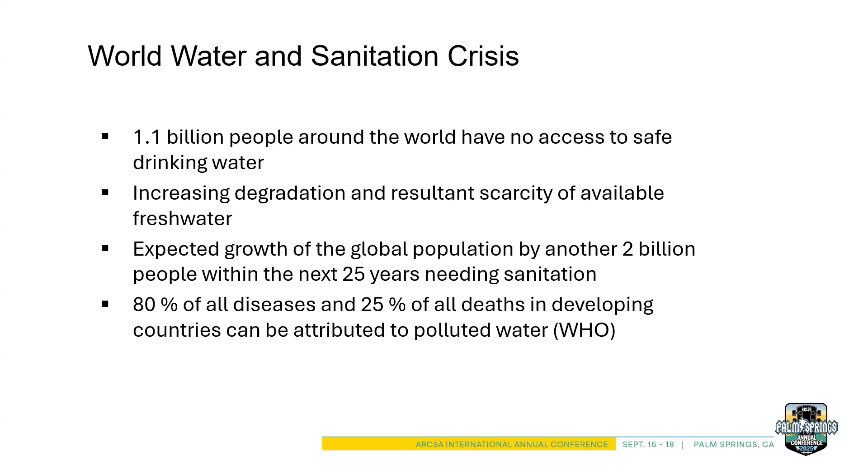As you know, there's a lot of people in the world that need water, and with pollution and things, the asset that we have—some numbers say less than 1% of the world's water is available fresh water for use—is a diminishing asset as we have increasing pollution. Coupled with increasing population, we've got increasing demand on that asset, and we can't forget that a lot of the really icky diseases are waterborne diseases. So that's why we see the importance of this.

Recently in Stockholm they had the World Water Conference, where interestingly they talk about food, energy, and water security, and how the water issue also contributes to food security in countries. The United Nations is also active—they have their Sustainable Development Goal 6 for water.

I was fortunate to attend, with my colleagues from the International Rainwater Harvesting Alliance out of Geneva, the 2023 convention, and that's where I learned the length and breadth of how international the problem of clean water is. About that time was when we got involved with Data Raywall there in Nepal, which kind of put an underscore on the issue.

20 years ago, we saw emerging droughts in this country, and we had some colleagues from Australia that were members. So we gathered up all the good ideas we could from around the country and around the world, and put together a rainwater guideline. That got the attention of some of the code writing bodies—the people that write the rules for plumbing systems in the country—with IAPMO basically being our chief supporter in that regard.

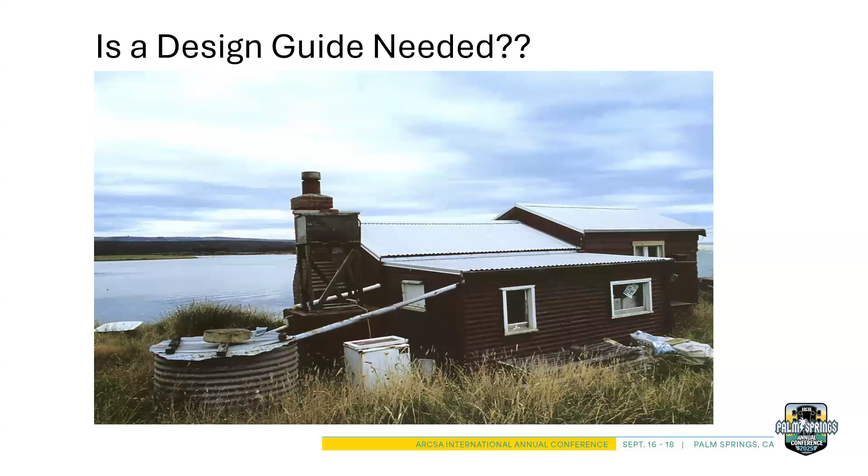But what about the people that are off the grid, that don't have access to power and some of the technology that we in the West have? That's what drove the need for our off-grid standard, reflecting some of the work that Data Raywall is doing in Nepal for his people.

So the first thing was first flush, trying to get the water clean. We've done a lot of papers, and I read a lot of papers when we developed this, and the common thread is that there's a lot of debris that comes off the roof—fecal matter and such—that causes diarrhea and a lot of other diseases. So the intent is, let's clean the water up as best we can.

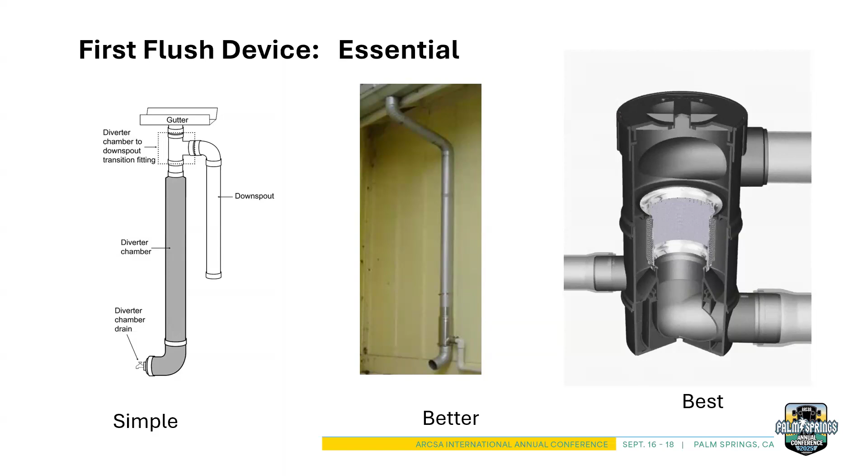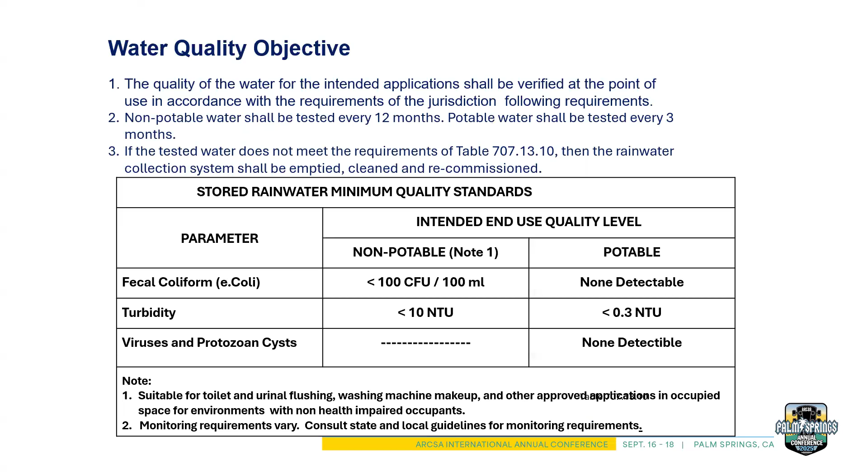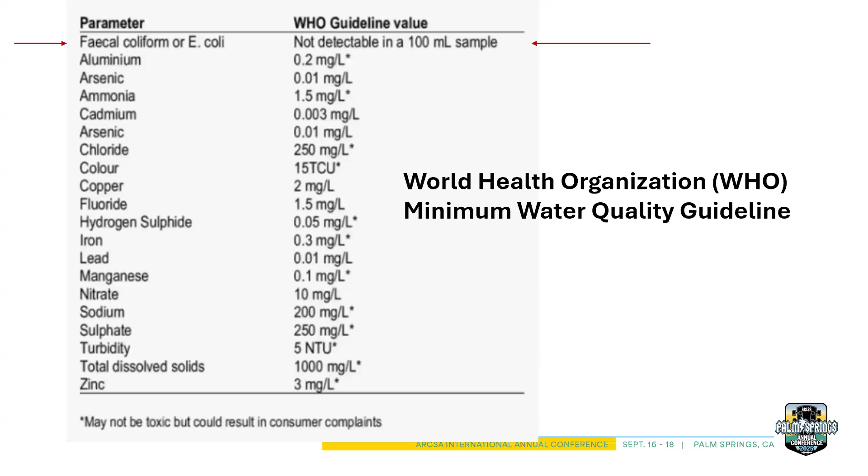These are the water standards that we try to aim for here in the West. Nothing new, but coincidentally, we're very similar. You can see up the top here, that's the same as the World Health Organization standards for fecal and that kind of thing. The East and the West are on the same page in that regard.

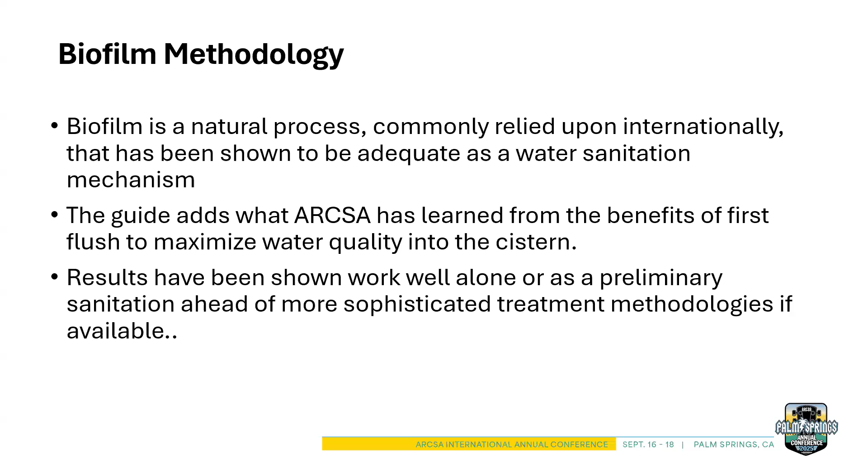The thought being, the better quality going into the water, the less work the biofilm has to do, and the better quality of water out. The results have shown that it does a very good job, not only as a preliminary device or even as a component to a more sophisticated sanitation method, but also as a standalone in some regards.

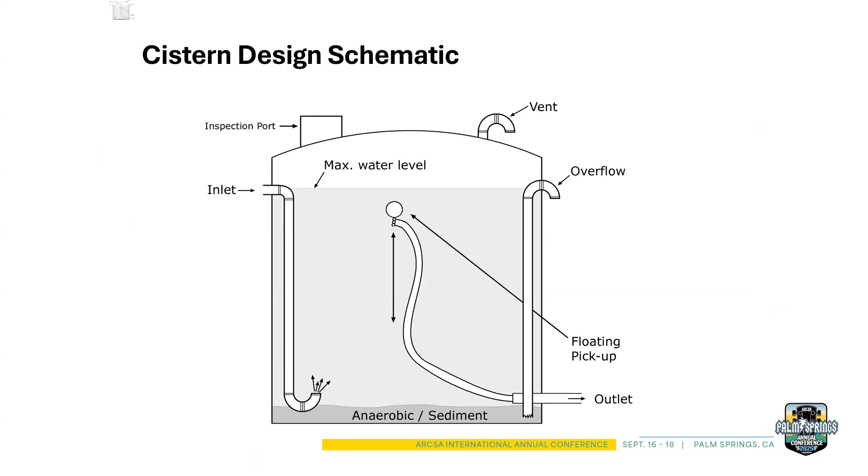The mechanics of the biofilm: it begins to grow, it matures, then it basically sloughs off. And this falls to the bottom, which is where your vacuum overflow would come in. As it falls off the bottom, that debris will be drawn off to waste, keeping your water quality clean.

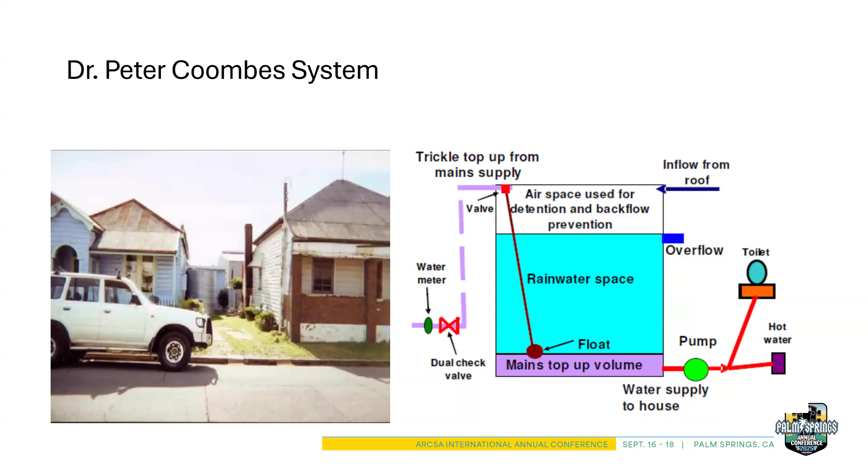Hot water is presumed to be heated to 140 degrees Fahrenheit, which I believe is about 60 degrees centigrade. Once it gets up to that temperature, it's presumed to eliminate all, or at least most, of the harmful bacteria that you'll find in water.

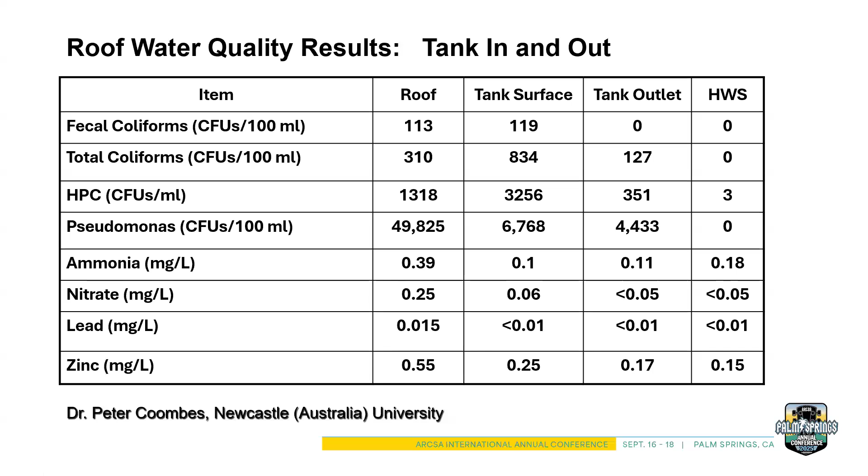This is another example of what you would call the clean tank, quote unquote.

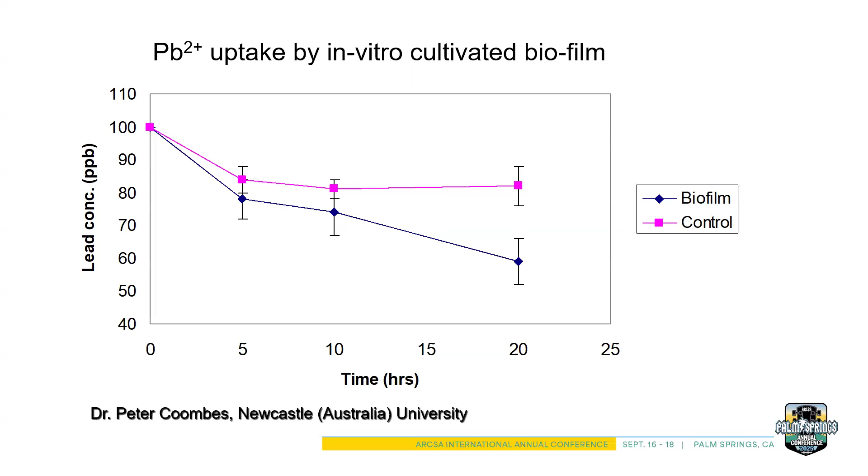Where you scrub the biofilm away, it doesn't really help that much compared to the bottom line here, where you can see the biofilm within a matter of hours can reduce maybe 40% of the heavy metals in the water. This speaks to the work of biofilm effectiveness.

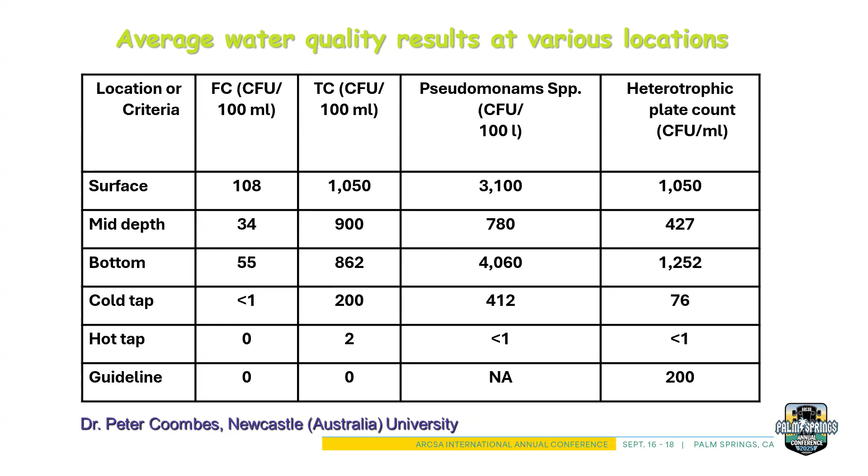As a side note, why do we want the floating inlet? As you can see here at the surface you have this level of contaminants, and at the bottom you have another level of contaminants. But at the middle, right below the surface, you can see the benefits of drawing water off below the surface of the water. This also speaks to the benefits of heating the water to further diminish the bacteria. This is the work of Mooyoung Han.

I met Dr. Han at the UN conference back in 2023. I was impressed with his work and have kind of been following it. Dr. Han basically does exactly what we're talking about here.

He took advantage of the biofilm as done by Peter Coombes in Australia, but he added a first flush that basically allows the water to be clean before it goes in and is distributed throughout the building afterwards. He uses sequential tanks, which adds additional surface to allow the biofilm to progressively improve the water.

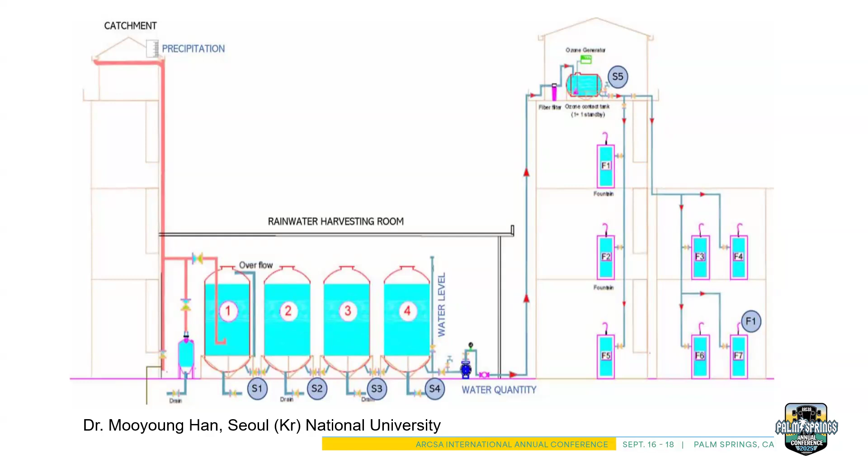As early research, he basically put a lot of small 3 by 5 inch cards on fishing string and strung them in a tank to provide additional surfaces for biofilm to grow. This is probably a more evolved methodology that he came to, doing the same thing only with sequential tanks rather than small cards.

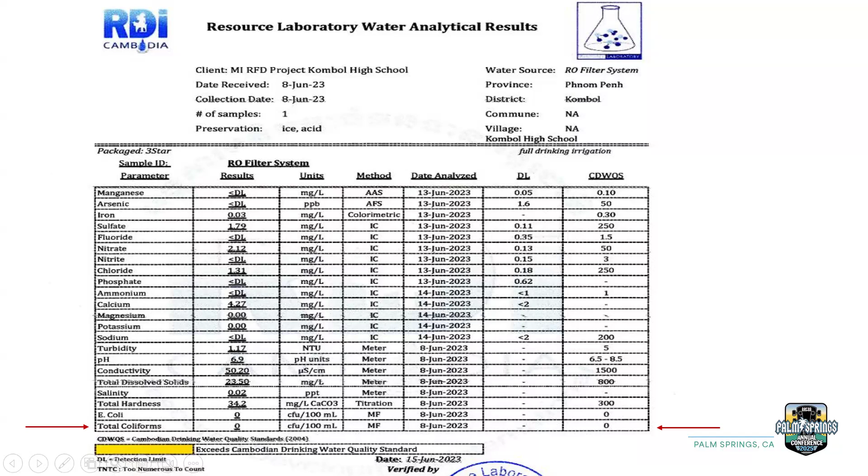You could see the effectiveness of this. This is a school in Phnom Penh, Cambodia, and you can see down at the bottom that yes, it passes the Cambodian Drinking Water Quality Standards.

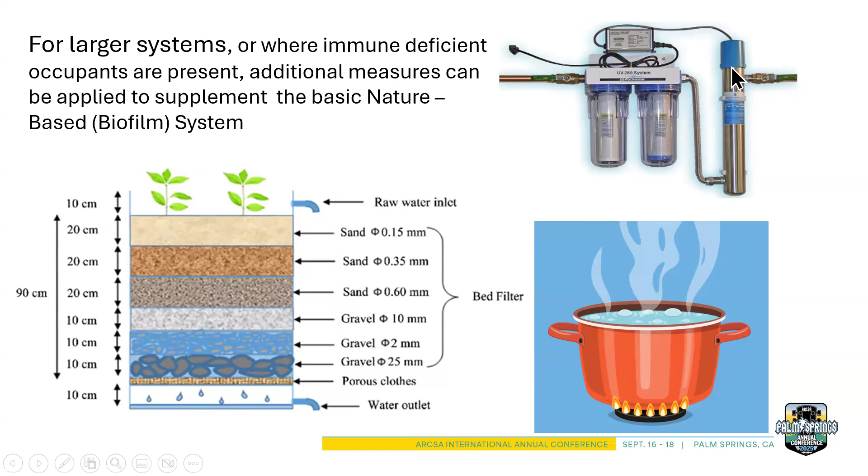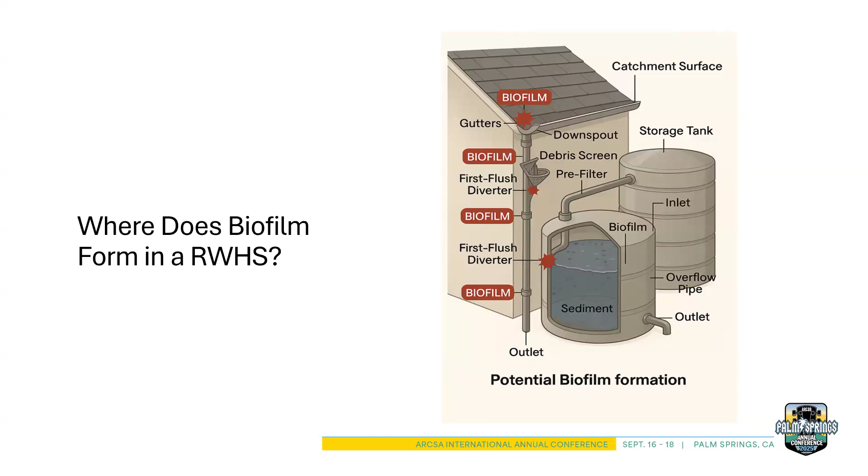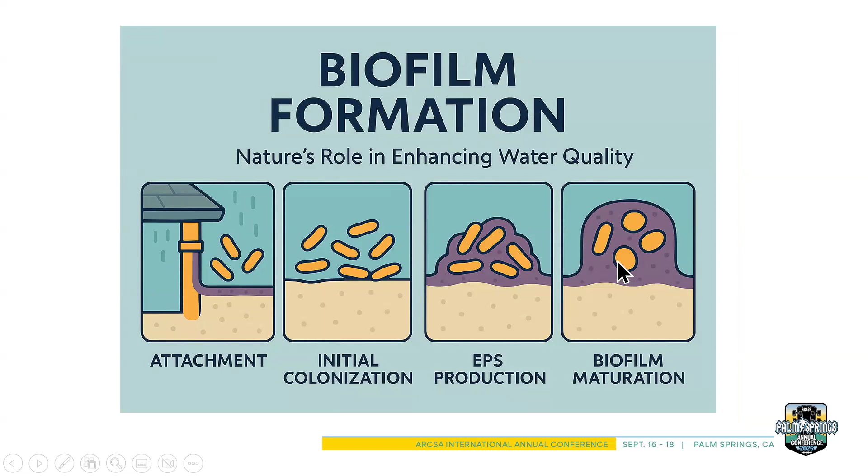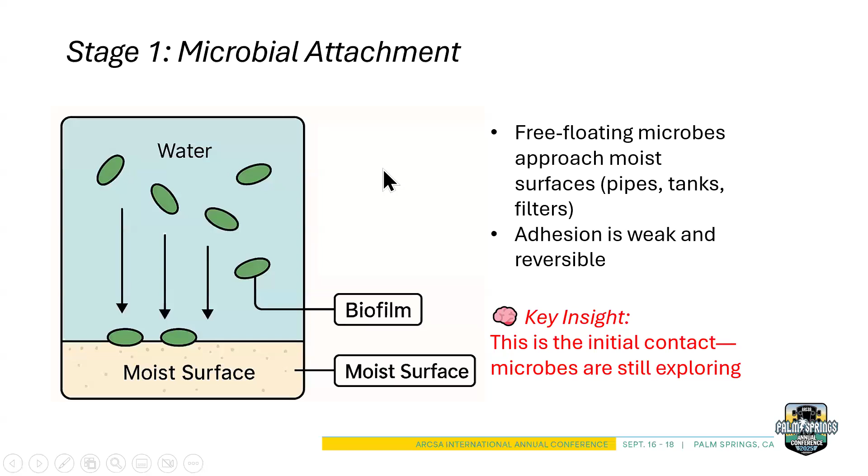I'll just skim through this and let you read it as you go. He does a good job of explaining it. Again, this is where it kind of starts, colonization, they multiply themselves.

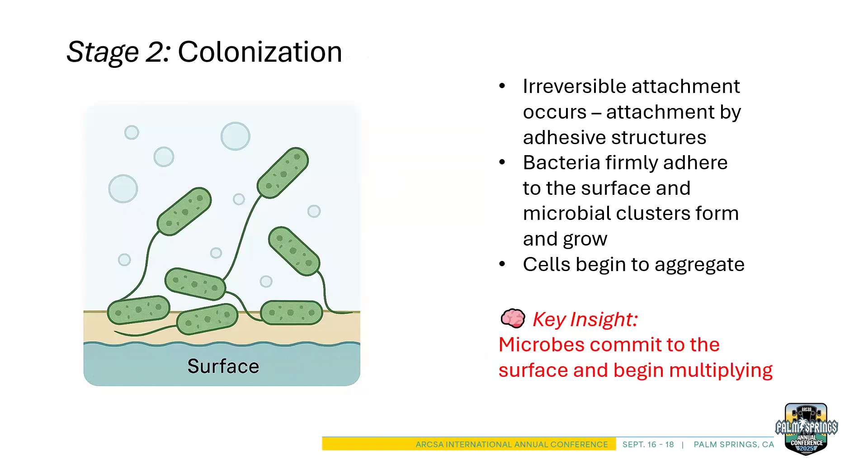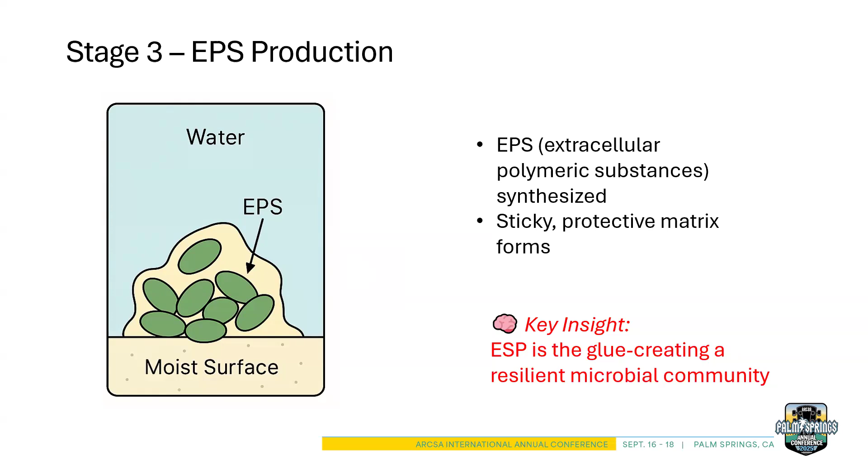This is kind of where the magic happens, I guess, in that they make this resilient glue around the process but create their own little microbe community, and they then feed on the bacteria and heavy metal that you're likely to see in the water.

So why is that bad in a commercial system versus the off-grid system? That's a good question. What happens is, as we go through the life cycle and the maturation system, they slough off, just like flowers or dandelions. They blow away and accumulate, and that debris acts as a media for bacteria to grow. Once it grows, blooms, and dies, it accumulates in piping, and that acts as a media for other bacteria to grow.

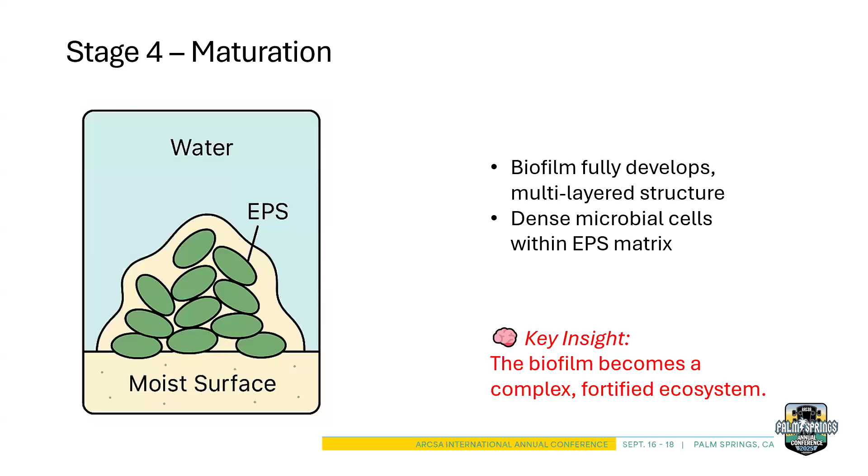But whereas in the rainwater system, it sloughs to the bottom of the tank and we flush it out, and that keeps the water and the biofilm working in a positive manner. Good explanation. Again, this is kind of what I was talking about—it breaks down and seeds the biofilm elsewhere.

Biofilms can enhance microbial stability, but may clog filters and reduce flow. That's kind of what we just talked about. Monitoring EPS - there was a definition of that I glossed over - that's the glue that goes around the microbes themselves. And then design choices influence the biofilm behavior.

One of the problems that makes biofilm a bad thing in plumbing systems is that we're still using the same pipe sizing they did back in the 40s and 50s, yet we have high efficiency, low flow toilets and faucets. That gives the water more residual time in the piping system, and more time for biofilm to accumulate. As a side note, we are in the process of revising our sizing parameters to decrease pipe size, increase pipe velocity, and move water through the piping systems faster.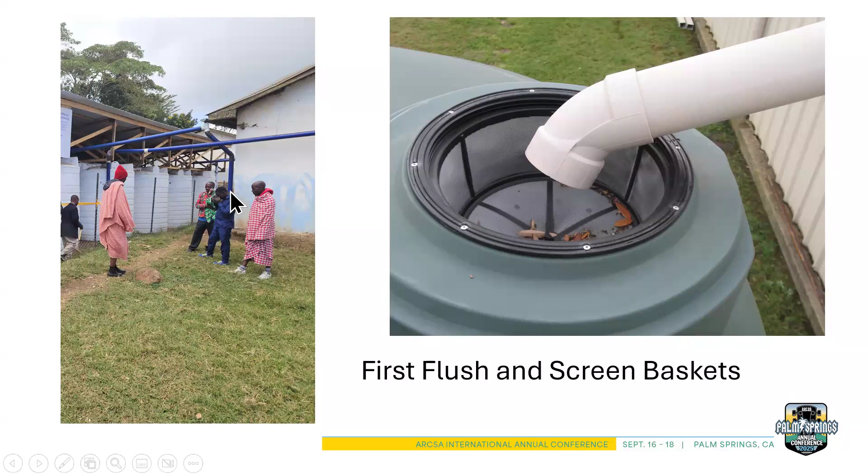This is one of the systems that Billy and his team put together. You can see over along the corner of the building where the first flush is, and the sequential tanks that Mooyoung Han recommends. These are the people drawing the water, which has been quite successful. I'll put an underline on the benefits: first flush, and then filtration of the water to get as good a quality water going in as possible. Over here you see the first flush piping, which branches off and goes to the tank - and again, the same thing, first flush going to the tanks.

Another project - these are probably the tanks they had available. We wouldn't recommend these white tanks, because they allow sunlight through, which lets algae grow inside the tank, which is counterproductive. But again, they do what they can with what they have.

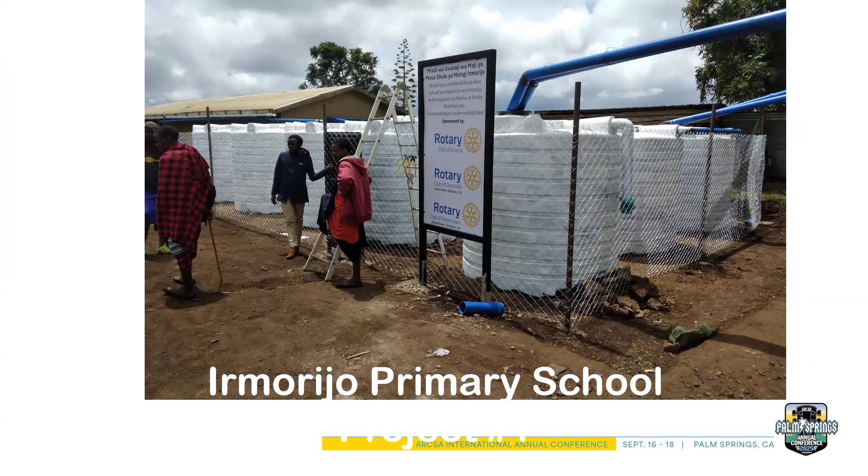Again, the primary school project, showing the first flush devices and the tank, providing for the entire community. There's the school - you can read that. 21 10,000 liter tanks, basically moving water around their campus here.

This is the man on the ground there, leading the charge. Apparently they pay off in goats in Africa - the men were so appreciative that they contributed goats to the school project there.

Another project - this was again from the conference I went to back in 2023 in New York, which introduced me to the international nature of the water scarcity issue.

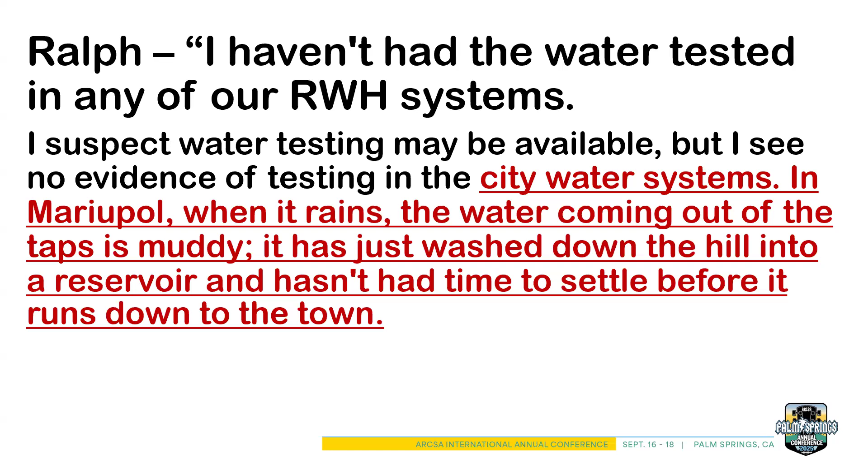This is where it gets kind of interesting - this is a quote I prepared for a presentation. I asked Ralph, and he said, 'Well, we really need to have a water quality sample that shows this actually works.' I got a little pushback on that, and there's interesting logic as to why. He basically says you need something fairly simple for maintenance, but maintenance is always an issue everywhere you go in the world. You can come up with great designs, but it's the maintenance everywhere that makes the difference between success or failure.

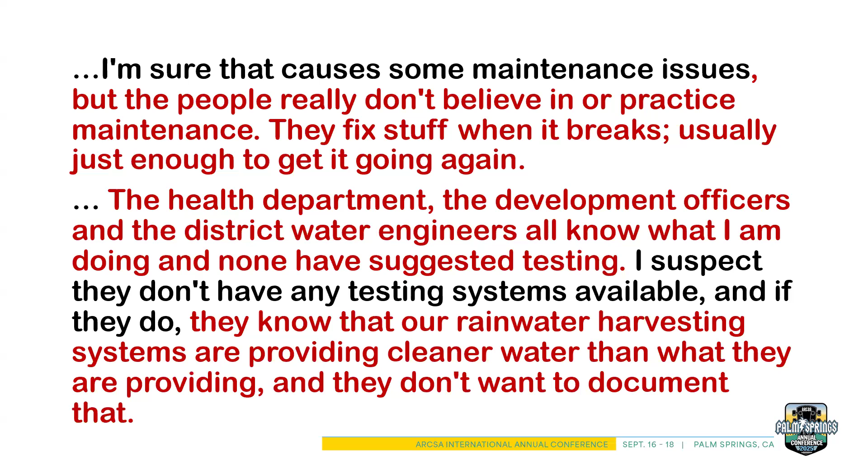Again, some of the favorable comments about it. And this is basically old school, here in the United States, where I'm at in the middle of the country.

A lot of farmlands were kind of stretched out, with farms beyond the reach of city water. So this was kind of an early version of what we're talking about here.

The first flush, basically, you let all the water run out until you felt the water off the roof was clean, and then you flipped it over, and this is what went to your tank. So we're kind of reinventing the wheel with what we're recommending here with the first flush.

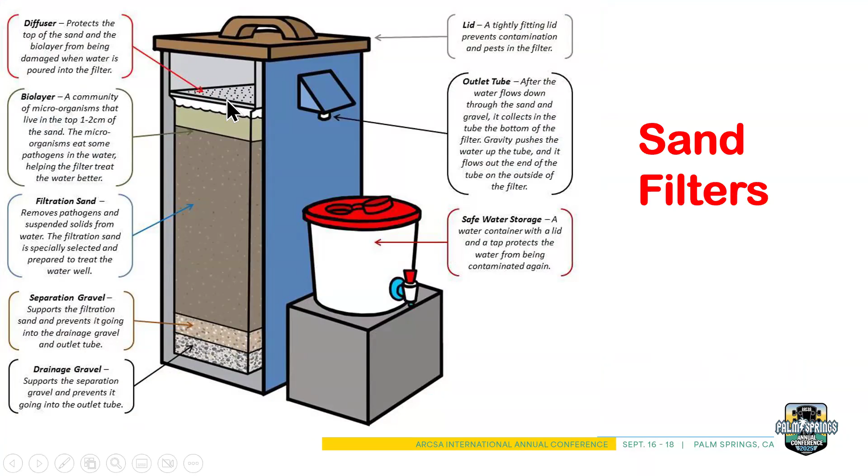This is an early sand filter that Billy Kniffen's mother-in-law actually used there in southern Indiana. This is another profile of a system that's more of a commercial version of how the sand goes down. They have a pipe that comes up and overflows, keeping the water on top of the sand filter. They actually tried to make a commercial effort in Africa by making them out of concrete, and they're still trying to make a market for those.

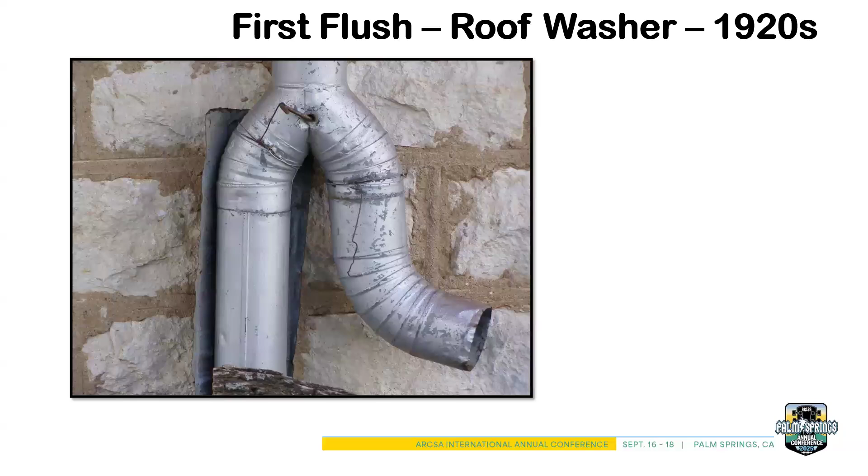But it's basically a sand filter, and this is some of the success of it that we see. I want to back up—one of the comments the guy made, I apologize, but the last comment at the bottom here is telling.

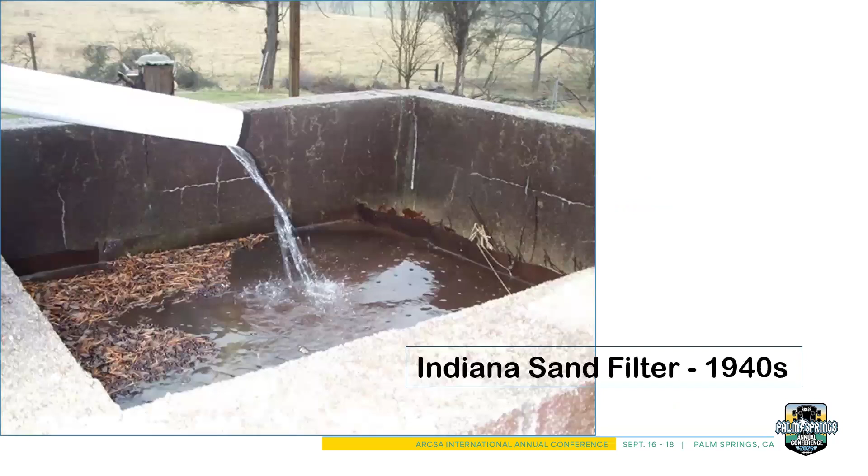Ralph basically said one of the reasons they didn't want to get a water test was there was a strong feeling against the local administration—that the water they were providing was better than what the utility was providing, and they didn't want to rock the boat. So they kept this under the hat, that what they were doing was actually better than what local utilities were providing. And it's been quite successful, as you can see—we saw kids lining up to get their water.

So, summary and conclusion: this is off of Mooyoung Han's work—that contaminants, including microorganisms, are attached to the biofilm. Water quality is improved as biofilms grow through nutrient degradation.

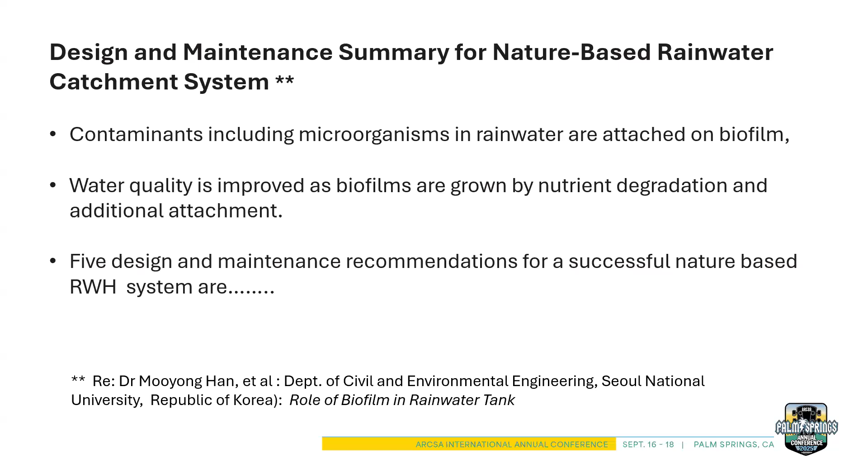The five design and maintenance recommendations for successful use of a nature-based rainwater system: first, maintain a clean collection surface from gutters and piping—that's what Peter Coombes recommended. Also, acknowledge that there's a unique microbial ecosystem which can control the microbial quality.

And this is telling—I don't know if you recall the detail from Peter Coombes—it's not a good idea to have makeup water from your utility, particularly if it's chlorinated, making up your tank, because that is detrimental to the biofilm.

Similarly, here we have shingles treated with biocides to keep mold from growing on top. We had one guy call up and say he did everything we told him, everything ARCSA told him to do, and yet it killed his tomato plants. He was kind of mad until we found out he was drawing his water off a shingle roof that was treated with a biocide for mold control.

So, yeah, you need to pay attention to your entire rainwater collection system—design a filtration baffle and a quiet inlet that basically eliminates the water from being stirred up.

I didn't mention this, but we talk about the vacuum overflow. What's common is basically they have a drain, or you take your water out four inches above the bottom of the tank, which is a very common piping connection. And as you recall from the Peter Coombes data, that's just right above the anaerobic zone, which is kind of the worst of the biofilm.

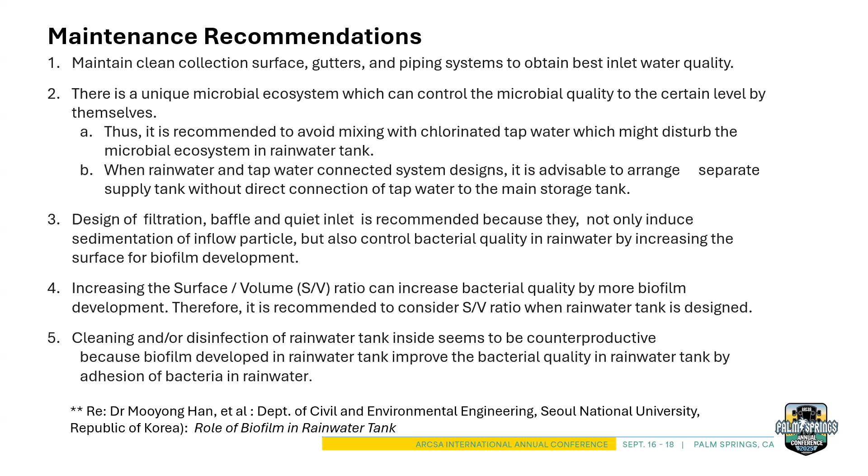And the punchline of it all is that cleaning and disinfection of the rainwater tank seems to be counterproductive. You need to let the biofilm grow, while keeping the best quality water going into the tank.

So, there you have it. Any questions?

I'm sure Festus probably has some questions.

I have a quick question on schools. We talked about putting a sand filter in the school, and the folks at Christian Relief Fund said it makes more sense to have a dual bucket filter in the rooms because of the break in school time, which could create a gap in the use of the system. As long as there's water still in the system, it seems like that biofilter would stay the same as long as it's flowing in and flowing out. What is your perspective on that for schools where you might have a gap in service or use?

A similar problem we had here is we had a civil engineer at Purdue University, where we did a rainwater catchment project for them. He came in wanting to prove a negative situation, and he came with this water test and said, well, you got this, that, and the other. We asked him, well, when did you do it? He said it was over Christmas vacation when the school was out, so the water had stood there for about a week or two.